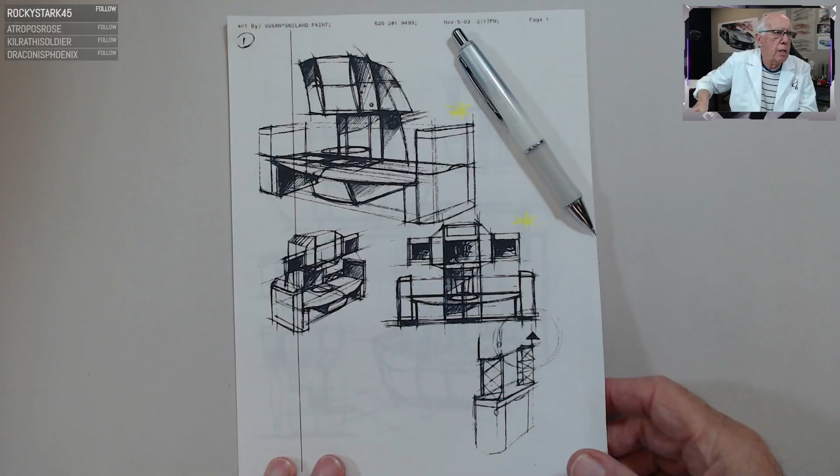This could be a very expansive program today, and I don't want to bore you to death, but this is a project that took about 2 years of product development work. It came out of California, primarily the California market, but the primary office I worked through was in Phoenix, Arizona. It was called the Microblend system.

Just a brief overview before we go into the sketch development, the history of this program: a group of entrepreneurs in California had the idea to revolutionize the paint shop industry. Instead of mixing up color with a lot of time spent getting the right mix, they came up with an overhead system to clean up all their inventory in stores and get into a more cybernetic approach to paint development, which became a module design along with storage systems to get things cleaned up in a store, much more direct and without a lot of fanfare.

One of the most important and groundbreaking features was the ability to sit in your living room and take a photograph of any place in your home—basement, upper level, bathroom, living room, Florida room—and send that photograph to a network center, then punch in what they wanted as far as color goes to mix the paint.

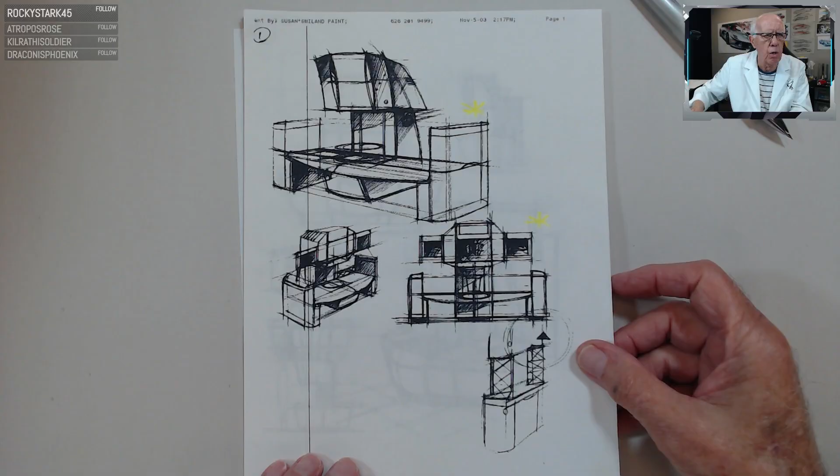I decided this would be a very unique program to be involved in because it involves so many different moving parts from start to finish, concept to completion. So let me go through the lineup, starting from the very beginning with some of the early concept sketches, and take you through the process to the final rendering piece we did within the marketing system. I think it's still alive today, though I'm not sure what the lifespan of this group, Microblend, was. But when it came on board, it was revolutionary, and a very unique system.

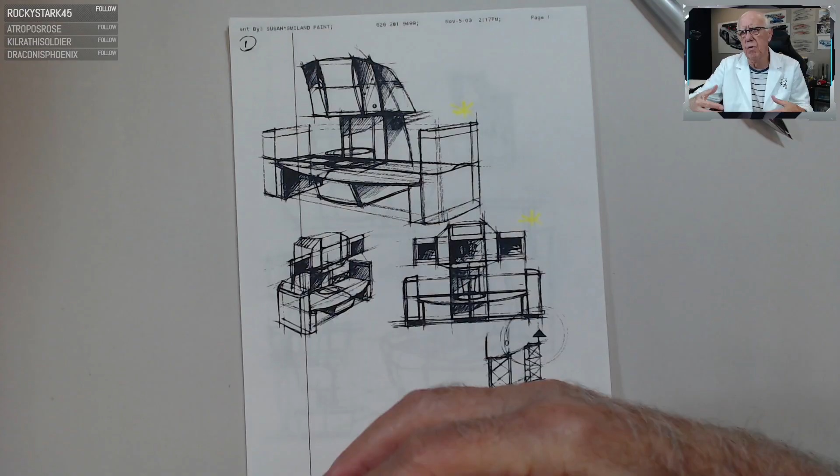From a product point of view, again, a very elaborate set of touch controls, mixing systems, television systems, containing systems, storage systems, overhead movement—an incredible plethora of things to deal with. But nonetheless, it came out to be a very good program to deal with.

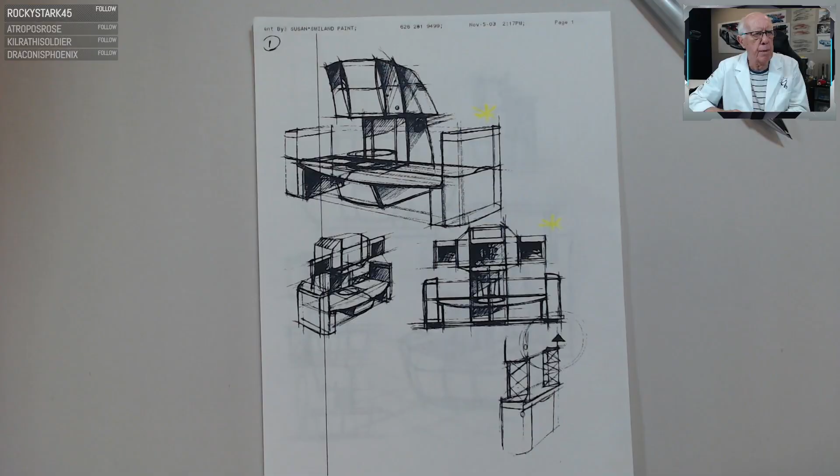So let me start here and go through a whole bunch of sketches. I'm going to spend a lot of time explaining them, but it all began here. I just brought out a Sharpie pen, a fine line pen, and started doing some thumbnail sketches based on what their conversation was. Really, the conversation from the very beginning of the program boiled down to 3 basic units.

It was almost like a kiosk module, with the actual pumping system involved in this upper housing, into a serving tray or platform you could slide back and forth. This would be adjustable, taking different bucket sizes or paint sizes. Then these 2 modules on the end were storage systems for different mixtures they needed, for example, in a pinch, to get things taken care of. The blending systems were entirely different—this didn't include some of the blending systems they were dealing with early on, which were very streamlined in pipe systems. You'll see some of those sketches later on in the process.

So let me go through these. We'll leave them over here. This is page 1. You'll notice a monitor system, very tuned-in TV screens on each side, which this design did not have—it had little plates.

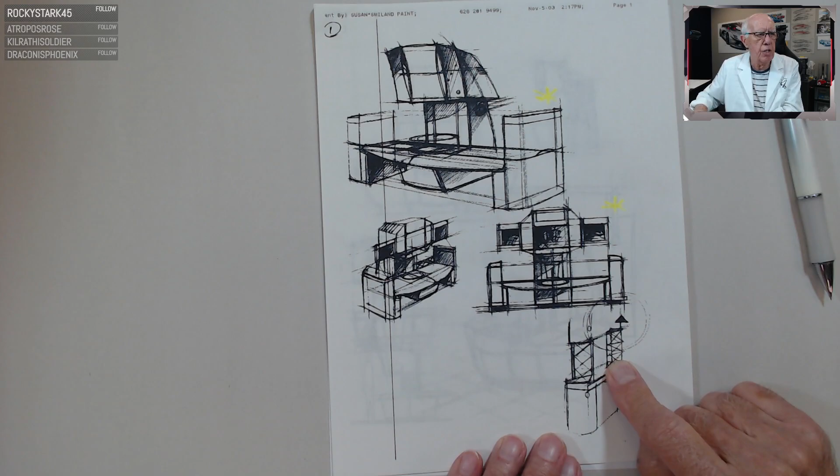Facilities for that, but it wasn't nearly as expansive as these two monitors on the right and left wing. Little thumbnail sketches along the way show another way of trussing the upper piece, which didn't work out well because it didn't support the load. So there was another page here as we go down the line. Again, simple side elevations, a little perspective, but more of a circle-in-the-round program with monitors above, and off it went from that point of view.

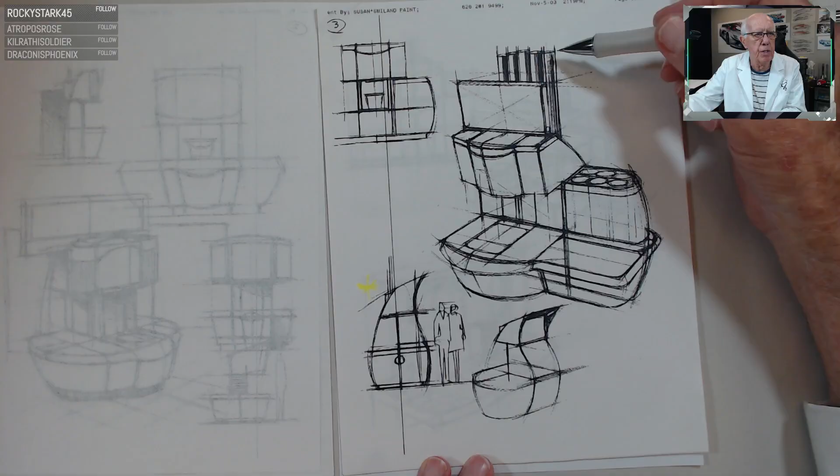So then the third series of sketches were sent. Now this is where we get into some of the mixing systems. This was directly fed to an upper overhead storage area. These piping systems would bring in some of the paint fluids that would be mixed inside this module and delivered here. Again, these are the storage containers for removal and so forth, to replace some of the pieces that were involved—brought back into the piping system to feed the kiosk that makes the paint.

A little elevation sketch here, maybe a more organic form to work with, and again a little perspective of what that would look like in gesture.

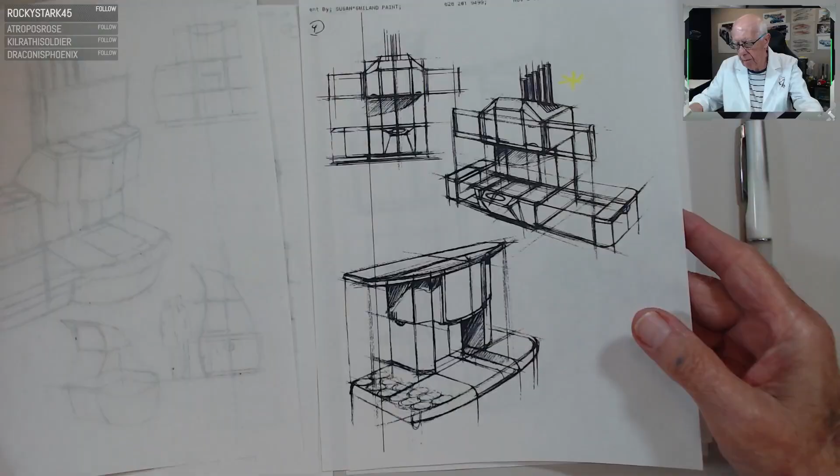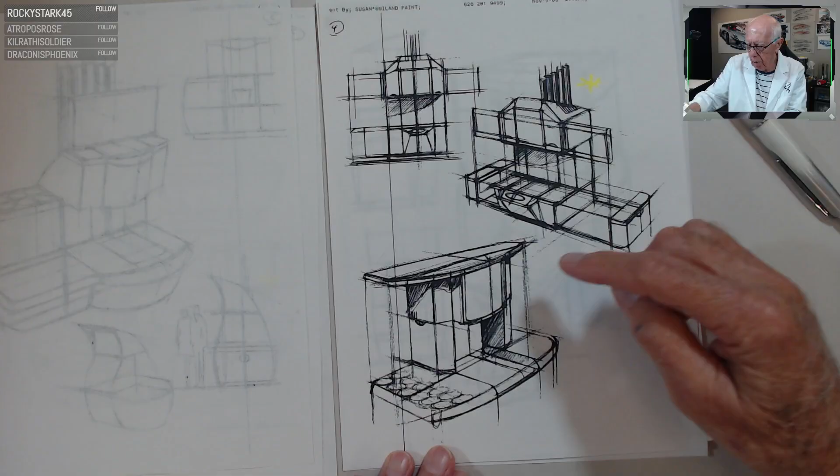Another page here, getting back to more of the straightforward TV screen system, very mechanical looking. The mixing system is in the center, with two monitors on each side. Another variation up on top where this board across the upper can be used as a shield. Notice the beginning of much more storage containers—the paint mixing platform here, then the TV monitor screen or the mixing system, piping system inside the main basic module. Again, further studies, a little more compact in this case.

I'm going to move it out of the way a bit here. This was a little more compact in terms of what the theme might look like. Again, a side elevation, and a perspective study, much more compact.

I think at some point in this process they mentioned having some limited, restricted areas that some stores were looking to get into. Eventually the plan was to go from small retail shops to a large box retailer like a Walmart, Costco, Giant Eagle, and the like. So all that was part of the plan some years ago to get that done.

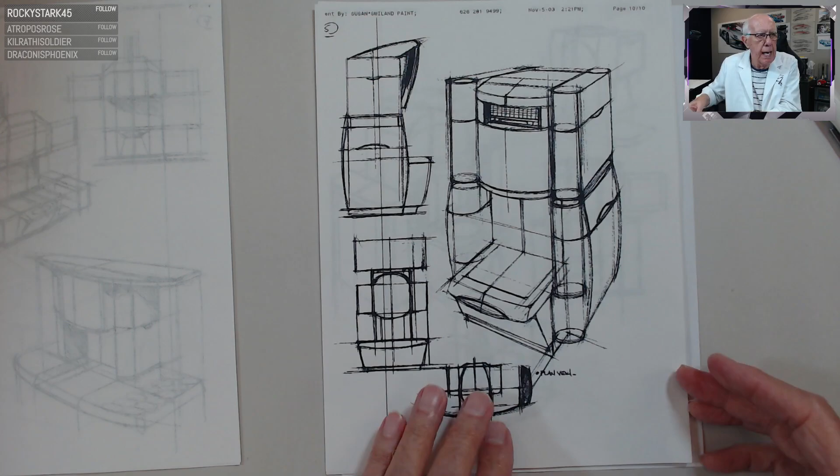Again, more compact, a little less obtrusive as a design theme. Now back to that same process where they actually had wings here—much more compact, a single wing with a monitoring system, pumping system, and a little station below. A dual system here, and maybe a fractured system, a little plan view break where you can actually view it from right and left.

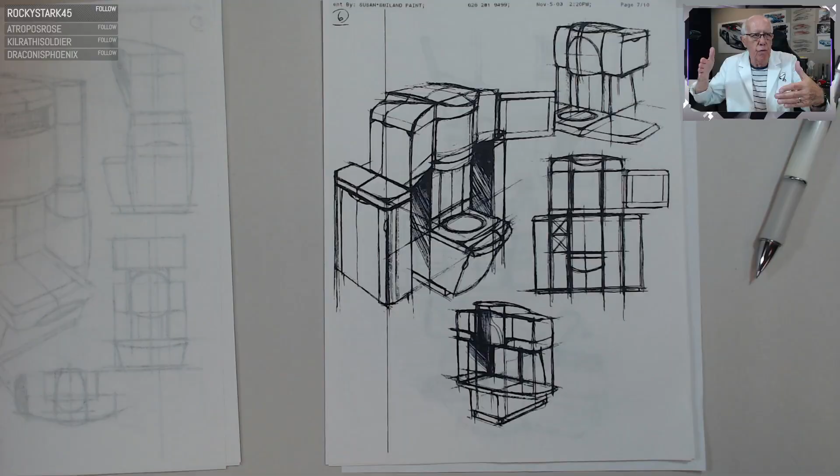You see that once, and I think in this case one of the conversations was: on one side we can show the illustration of what room has to be painted, and then this would be the mixing system process, touch screen control, where they punch in the dial numbers to get the paint system they wanted revealed. So again, additional thumbnail sketches.

By the way, just a quick interjection here—these were very elaborate meetings in terms of these sketches, done week after week after week, looking at particular things: 'Well, let's try this. Well, let's try this.' It's much more a cause-and-effect approach.

But it slowly but surely began to boil down to a simple theme, and it worked out pretty nicely in the end. You'll see as we wrap up the program today what the final product looked like—very revolutionary and very well received on the retail side of life as well.

Again, another very compact approach to it: a single monitor up on top, mixing system below, paint tray and storage on each side. Some of the systems here show how this begins to operate—this would be the lean system, this would be the table area where the bucket would mount, and storage modules on the end for some of the paint containers they needed to replenish or remove.

Back to this piping system again up on top, the feed system, the very same module series. A little bit more width involved, a little bit larger in scale, but still the same theme was all there. And by the way, throughout the conversation, all these sketches that you're seeing now were all generated as part of what-if thinking from their vision, the three business partners. Their vision was something very electronic looking, very modular, and almost kiosk-like. So that's why these sketches have a lot of similar characteristics, but a little bit of variation in theme from program to program.

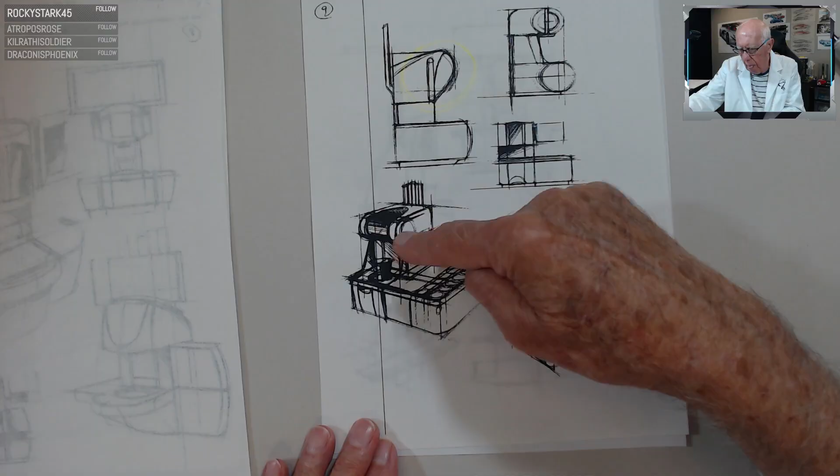A few final studies here, getting a little softer, a bit more animated look. Not really like that direction, but it was interesting to see that as one of the themes they looked at as a possibility for this headpiece, where the action mixing system or the pumping system would be.

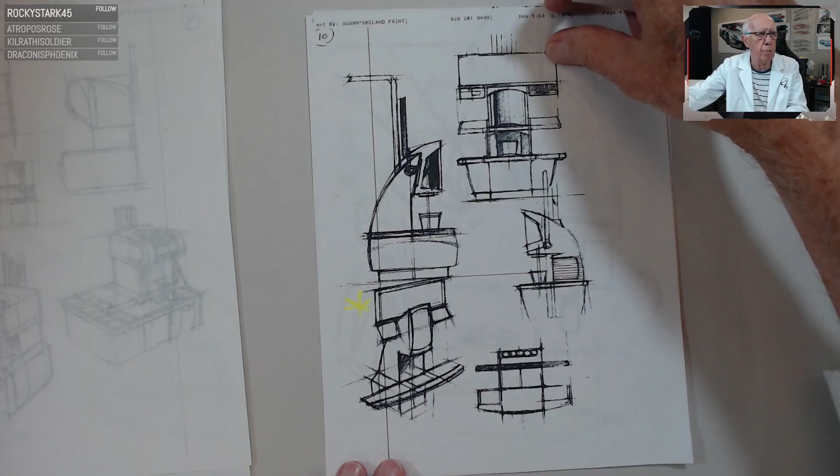Then the last series gets back into a lot more organic look. Again, there's this feed system coming into the unit itself, overhead piping, much more expansive, with one large board up on top of the system. Let me move this down just a bit. There you are. Basic elevation here, sort of the side view, with the simple monitor up on top, two touch screens on each side, a serving or delivery tray, and then the platform speaker.

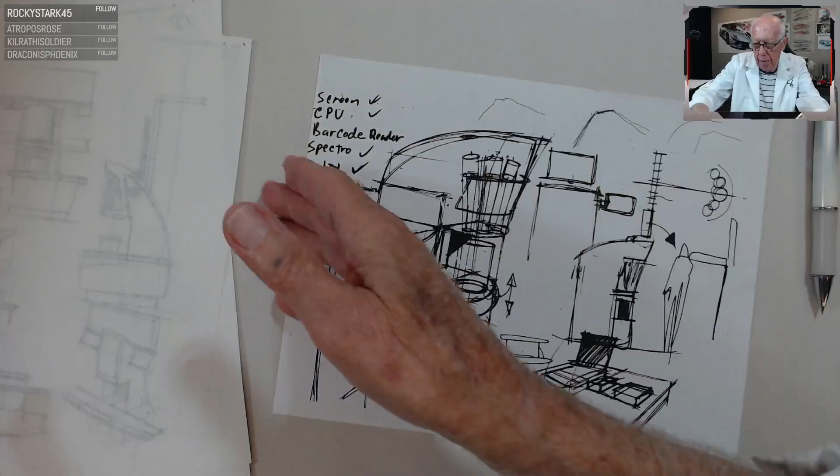But the interesting thing is the last sketch we did really broke things through. This one really kind of put it all together. Let me turn this sideways a bit and see if we can do this. Notice how this sketch began to really mirror what we were doing at the very beginning.

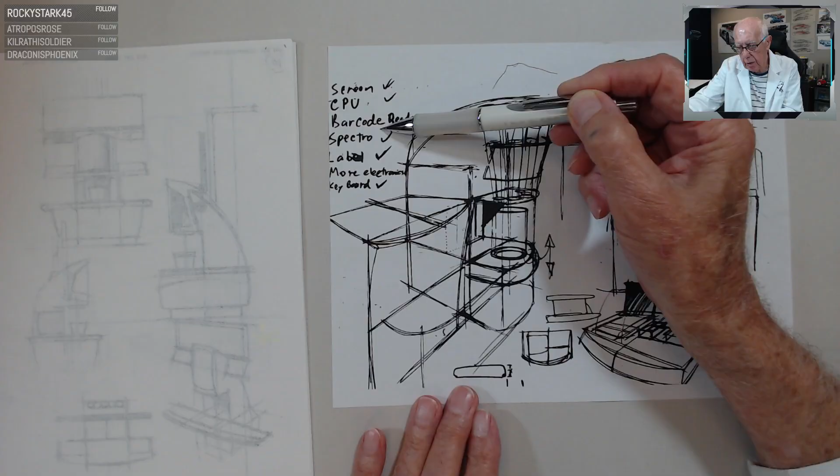Notice how all of a sudden we started getting more information about what the character might look like - the storage module, the paint tray, the mixing system up on top, the very large viewing monitor, and a little thumbnail study about what that platform might look like. Notice the things you started really focusing on: a video screen, a CPU system, a barcode reader, a spectral system, labeling, more electronics, and a keyboard - meaning much more touch control pieces along the way.

And we went to that. Now, isn't it interesting - this is where we ended up. Look at the very first sketch we looked at. This is the one I prefer as far as character goes.

Let me move this over just a little so we can see where they are. This one was the one that was picked up. It was a long series of sketches to get to this program, but the very last sketch came right back to this - our favorite, preferred one. That platform look was really helpful for them in the process of putting things together.

So let me move along here. This is the first pass of sketches. As it began to develop a little more, let me move this out of the way and get these up over here. As it moved along, these are some of the more refined sketches. I'll go through these quickly - there's a lot of history here, and I don't want to bore you to death.

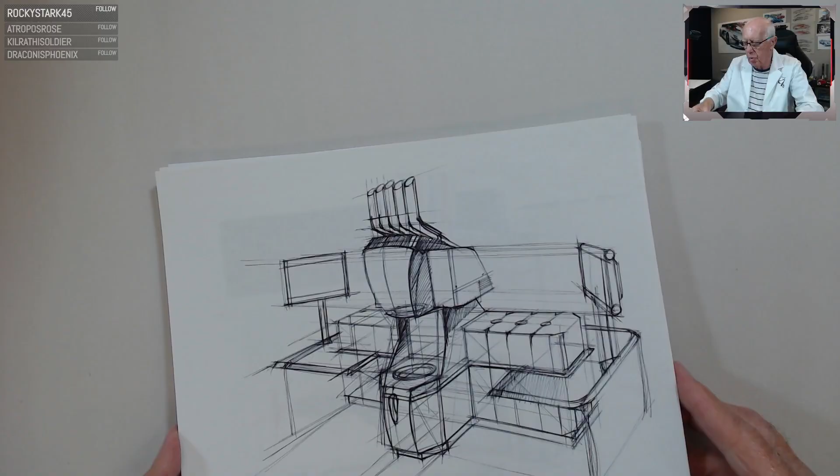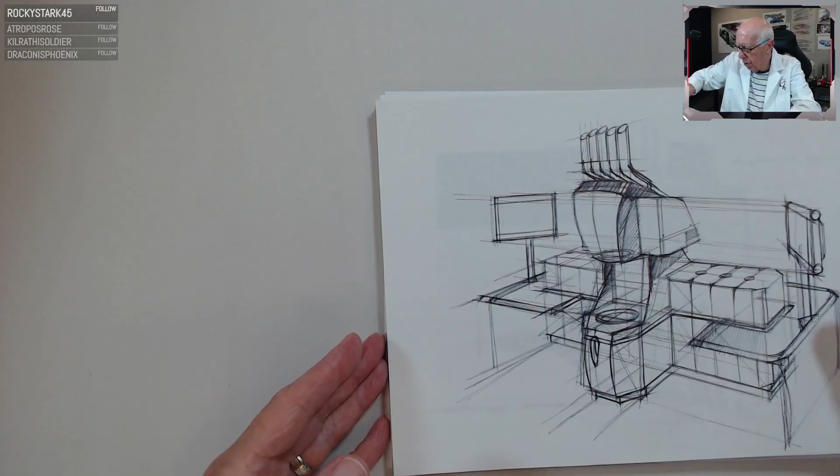But notice, once that platform was set - let me get this back in here for a moment - the relationship started to take advantage of it. Aha, that's the theme they like. What if we start addressing this thing and giving it more of a formal look, or much more of a packaging look? Let me get these out of the way again, pardon me, and we'll go through theme after theme, just focusing in and trying to find the right solution for what this system would look like.

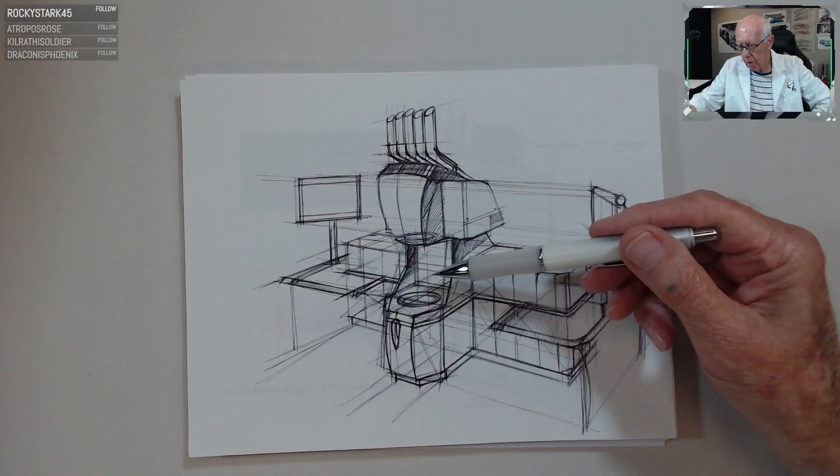Here again, this eventually was eliminated - that feeding system from an overhead storage system that I'll show you later when it got into the actual retail areas. It would feed the basic mixing module, touch screens on each side, and some of the storage modules in this table tray, or certain size gallon, 5-gallon buckets, and the like, when beginning to mix the paint. So there's one little thumbnail sketch with a bit of color added, showing primary colors feeding an overhead feed system and some of the canister modules, and how that began to look.

So we started to refine the sketch a little bit more, the scene just a little bit more. There's a little study here, same process, opened that up a little bit for an elevation. A little detail on that mixing system, the dispensing window, and how that might look in this form.

A little bit of perspective sketch, very thin and almost a wafer-like approach to the actual module that they liked. And again, twin monitors and then the mixing system coming in.

So there we go for a little further refinement sketch. All of a sudden it started to take on some of the character they liked—the mixing system, the table tray for convenience, touch control screens, the pumping system or mixing tray, and the platform for placing the buckets. This would move up and down depending on whether it was a 1-gallon or 5-gallon bucket, kind of putting it all together.

So let me move along quickly. Here's a lot of stuff to cover, and I don't want to be guilty of boring you to death, but this is a big, huge process.

About a month or two into the whole process, we started looking at what do we do with the retail space—how do we display this thing, what does it look like? This would give me some idea of what that mixing system would look like, with all these primary colors overhead and storage that you'd see, but not as obtrusive in the store itself.

And then all of a sudden, notice that all these things are going to funnel into this mixing system, into the actual module itself. The rest of this sketch was just a basic overall character.

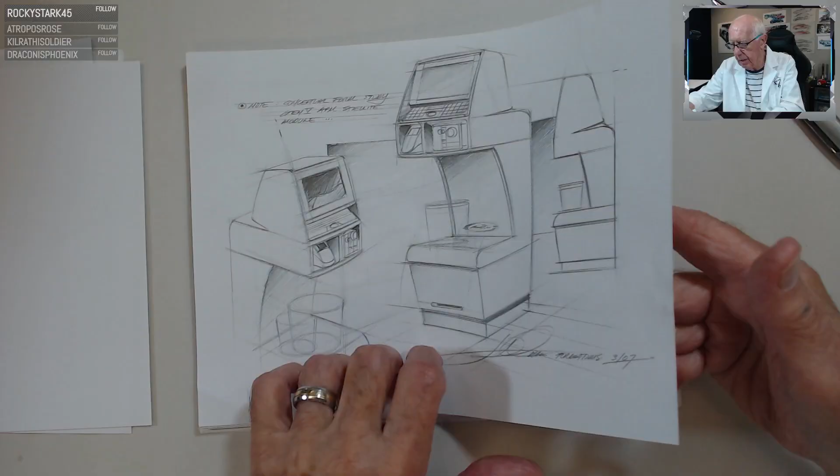But again, integrated—this is the actual unit, the satellite module in line in position with the housing, the keyboard, flat screen, and the spectral and label maker. This is all attached to this, but this piece on the right moves quite a bit—that's much more mobile. This would be the fixed system.

And then this is a color module, with a color shelf unit and storage system below. And again, same, maybe storage below, a little bit of sliding.

Notice where the bucket is in place. This thing would move up and down according to scale or size, and you get the deliverable here as it comes through the line.

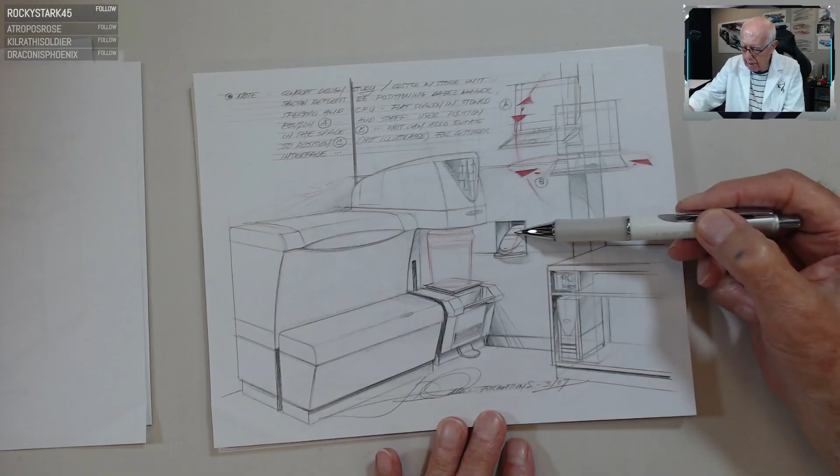The next sketch here, same process, maybe a little bit of a modem. In some cases, the stores would have maybe a separate unit here for a PC system, a dialing system, module for control, and then also a movable keyboard and TV system up on top. So this would be more of an install, like a big box system where you might not have room to put some of the elements together, so they wanted to separate that out as well. Let's move along here.

Some ballpoint pen sketches of what this module would look like. It's a satellite module, an interesting little concept that would be a part of the whole process. But again, this would move around all up through the room or with you, or certain stations within the space.

To kind of work to solve the problem that you're looking for. Paint. There's another series of little modules, Gen 5. The traveling modules here, kind of interesting little thumbnail sketches, quick ballpoint pen sketches for the actual robot itself that would move the module.

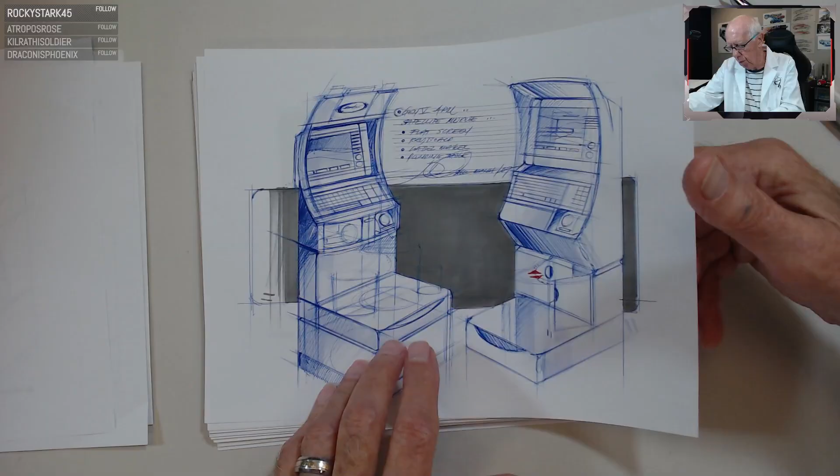And then here it is in a different position. The module side by side next to the actual mixing module. Again, that same process: storage, the touchscreen, keyboard, the label maker, and the pounding table, and then you put the lid back on it. So as you move on, once it's filled, you move it out, and you begin to pound it, put the lid back on, and secure itself.

So I think you can see thus far a lot of things are going on in terms of what this project was really all about. Again, highly revolutionary, extremely complicated in terms of little touches of idiosyncrasies that had to be addressed. How do you manage it? How do you facilitate it? What are the systems involved?

The electronics alone, the IT system was overwhelming. I'm afraid to think about how much it would cost to run this thing, as far as what their expenditures were to get this thing up and running eventually.

Again, some little studies here, and this goes back to the main overhead pod for the label maker, for example, what that might look like. Again, little thumbnail sketches that kind of isolate the piece, like the storage module that would sit next to the actual mixing module. So there's little sketches there that would kind of come together with it.

And we go back up on top here. We roll over again, still looking at maybe some very simple little form studies, stainless steel for the actual paint storage area there. Back to some cap studies for the actual mixing component in the primary module itself. Looking at different ways of treating that windows system per deliverable, and some little detailed studies here about maybe little touch controls or card systems that will be punched into that for availability in mixing systems.

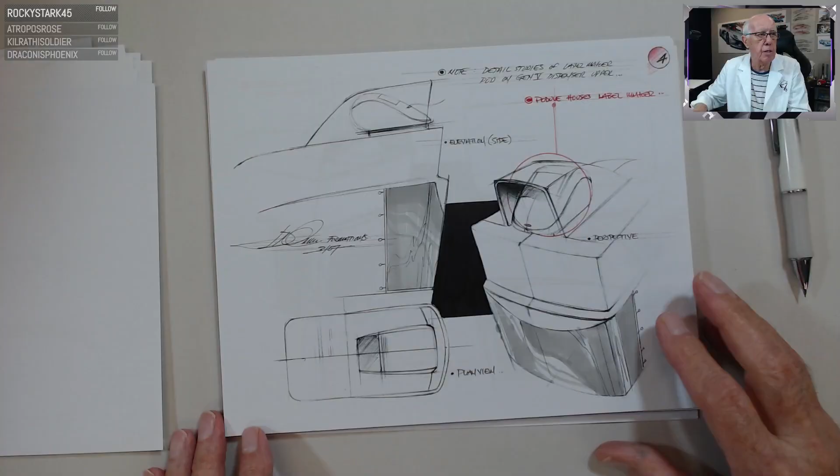Again, this is detailed studies of the label maker, maybe up on top of the unit this time. And instead of being integrated into the window, it comes in, comes down, and here's the actual mixing window here.

Elevation study shows you that, and the module houses the label maker. You punch in all that information and the label will be made, and you put that on the can as you made it for the store. Sorry for being rapid here with this thing.

There's so much involved in this, and so many sketches that were done. It was overwhelming. I just kept cranking on this thing. Great to work with, and I had no difficulty whatsoever with the actual management themselves.

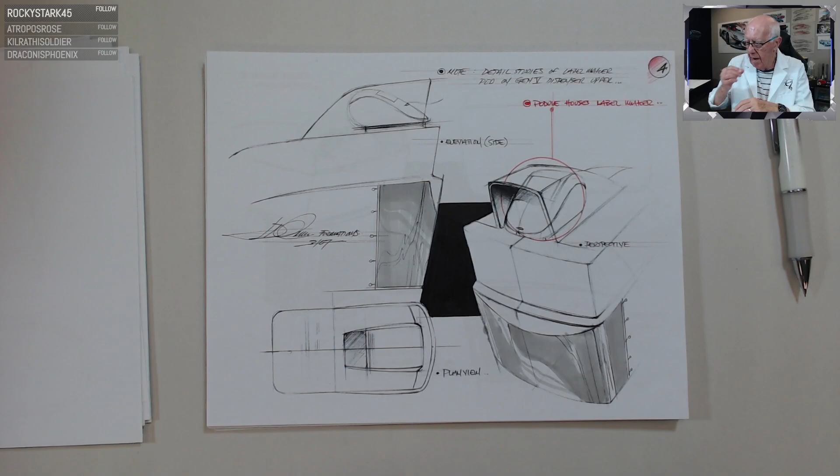They liked the process where we're following some of their input, which I think is extremely critical. You can't go out there on your own on something as massive as this. It was an all new experience for me, so I was really tuned into listening very carefully to what the issues were and what they wanted to deliver, what the character overall was. They did an excellent job guiding me through the process.

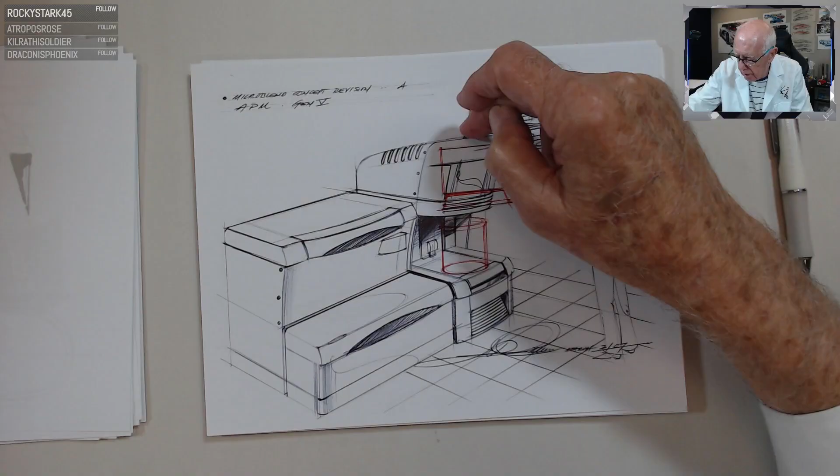Little thumbnail sketches, really rapid little pieces. These are all part of the history of this thing now. Back to some studies with a label maker inside the actual microscope module. Really quick studies here, and this is a compatibility piece where you've got the actual monitor attached to the side of the piece itself, which would pivot and move up and down.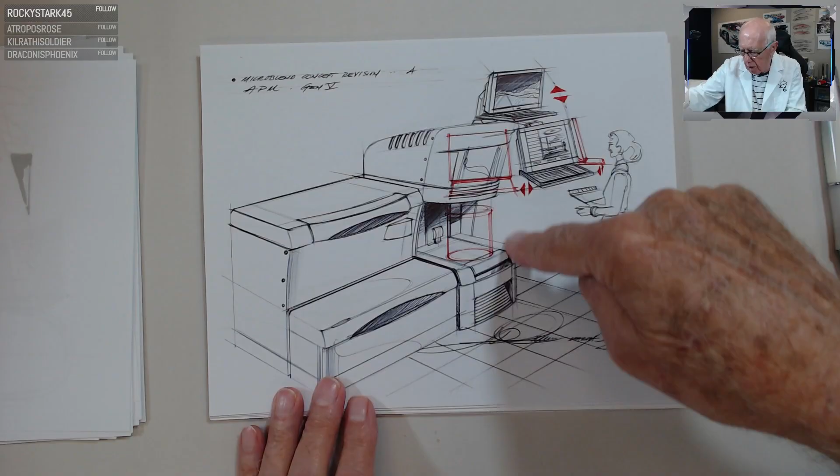You'll see that as we go down the line in the actual solving of the problem. Another little family of forms here, the robot and the actual module itself gives you some idea of the scale of this thing as we begin to move through it and put the pieces together. Nothing changed much. We kept that same overall hood, much deeper now because of the mass of what had to take place behind this thing to make it function.

Again, the labeling system in a weigh station here. This is a little module, a little robotic module that will move around with you as you go through the process. Let's see if that's one. There we are. Here's a little color study that was done for it.

Just a real brief little color study, which is a compatibility piece. There's a little module next to it, so that goes there. Just a line study here to kind of put the pieces together. Handle system that would move up and down or be removed, so it can be removable.

Little black and white concept sketch. The lid opens up, storage inside that. Again, the satellite module itself on the other side. And again, the main mixing module, right in center.

Here's another one, color study. This would be more of a retail space, like a large box system here, where you can move this over just a bit. You'd have a traveling little laptop that would fold and be concealed, and then a power system underneath. The label maker here, and again the mixing system and the basic module.

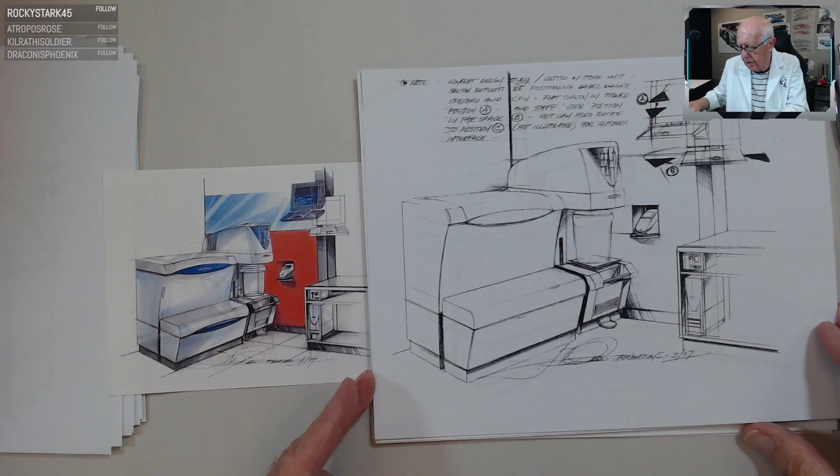This again was a restrictive area that we were working at. If you've got a very small space, like an 8x8 square in a retail space, or a large big box area, this would help facilitate that look.

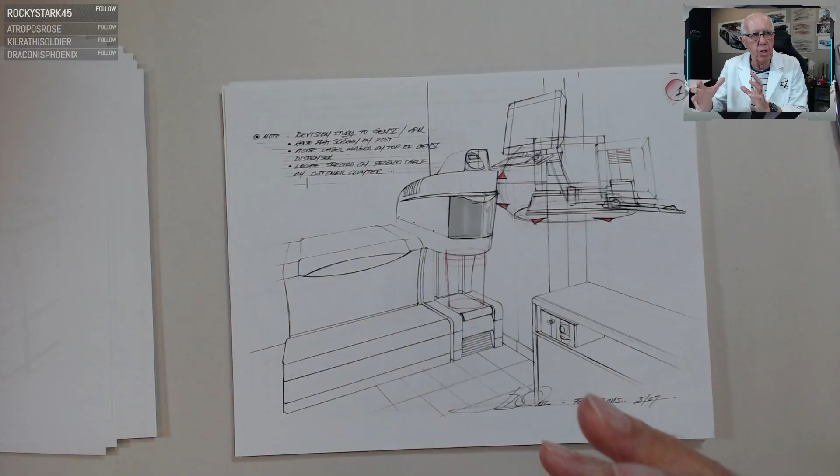Let me put that in place here and we'll move along, get this back in the center. There we are. Again, same little line study here based on it, a bit more of an elaboration of how this thing might pivot and move around this laptop system, with the same refined space concept here. Let me move this again just a moment. Let's get these up and running out of the way. There we are. No more space to work with.

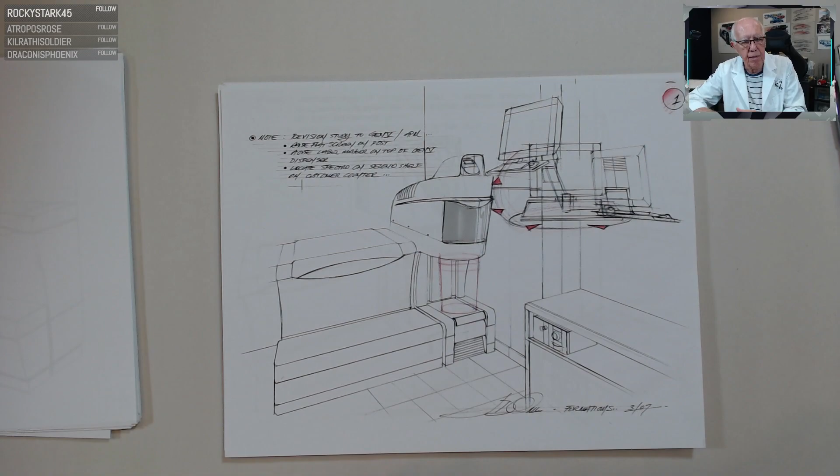As you can see, there were so many things going back and forth in terms of conversation with management - let's try this, let's try that. So every sketch had a function behind it. Nothing here was wasted as far as I'm concerned. It took this much time and effort to really tune in and focus on what the actual concept was and how they wanted to deliver the whole goods.

So here we are, I'll move along quickly. Another little detail of that same system. Gen 5, revised direction to cleanly integrate the label maker into the upper.

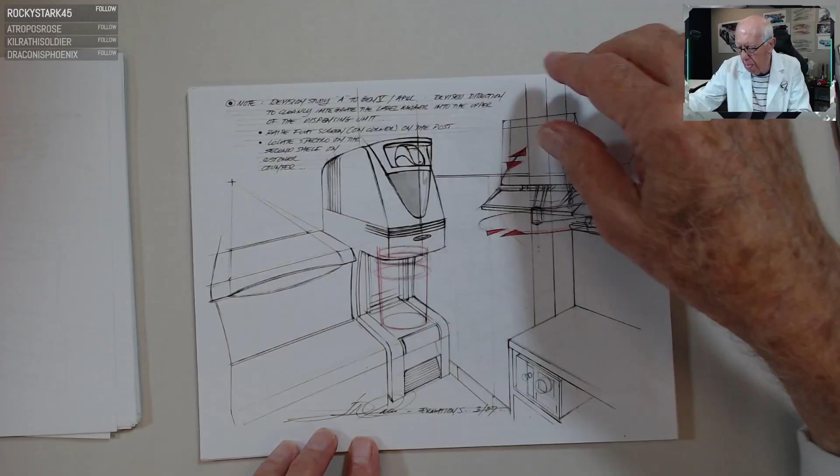Again, the same mobile system here. Second shelf on a customer counter, sit here and over here. You could put information on that counter shelf in that restricted space to work with. A little module again, with the satellite off to one side and the actual bucket system.

A little detail here, much more the same thing. We've got a couple of little color studies here. Here we are again, that restricted area. Notice the in-store layout, for example, keyboard, spectro, label makers, all these things.

Now we move a certain thing from underneath up on top of the same mounting post to keep things integrated and all together. Notice a bit of a change in the character of the actual pumping stations, the modules that would inject the paint into the actual bucket.

We go down to another little color study, same process, restricted area. Back to line drawing again. Some of these are probably redundant.

Pardon me here, elevation study real quickly. Again, this mechanical elevation of that little module area here. This would be a detail of what that pulsing system would look like with that arm on it, you can kind of pull it out. And a very flexible side elevation of the pivot arm for a user position.

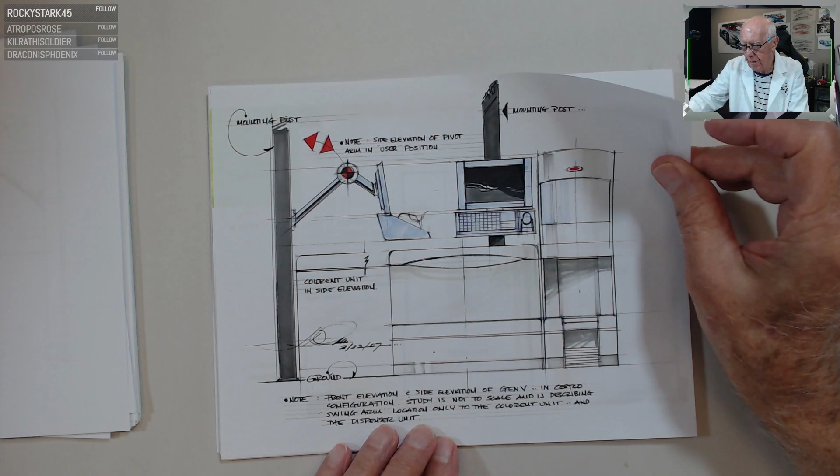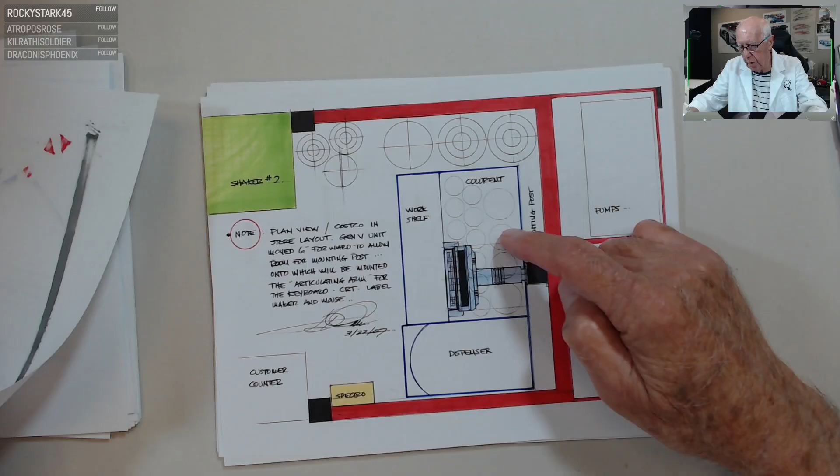So overall plan view, for example, if it went into a tightened area, very simple area. The shaker would be over here, the actual colorant would be here, there's the actual mixing module, there's the post we referred to earlier. That was over in this sketch here. This is a plan view look at what this might look like in store. So that's part of that process.

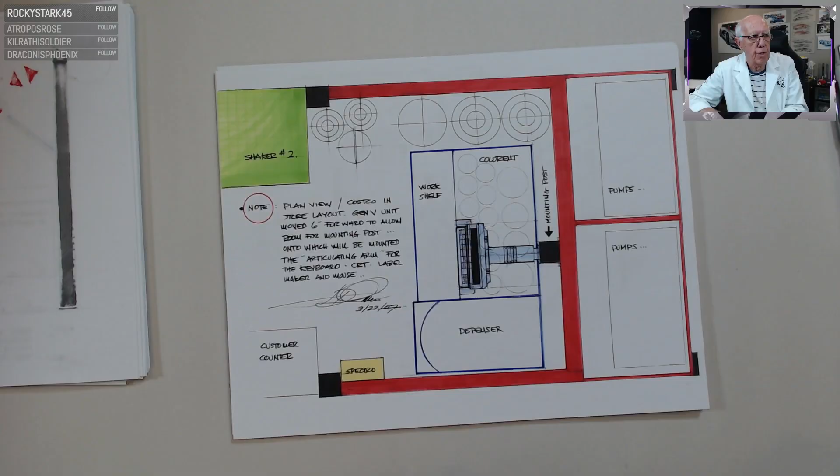So move along here, now this is interesting. Now we go from this generation, opened up the door. After all is said and done, this sketch was finally part of the process as we're going through this from day to day and month to month. The individuals in the marketing team in this group were going out there trying to sell it to the big box operators like Costco, Whole Foods, etc. Costco, I think Walmart, that box size. So this became a breakthrough to get things moving.

And then once we got this, when they saw this, this is an interesting concept for paint use. We can save a lot of space in inventory. It's all condensed, very focused, a very contemporary looking piece of hardware. Let's take a look at this thing. So from this sketch, all of a sudden, Costco became the first primary manufacturer or big box to look at this thing.

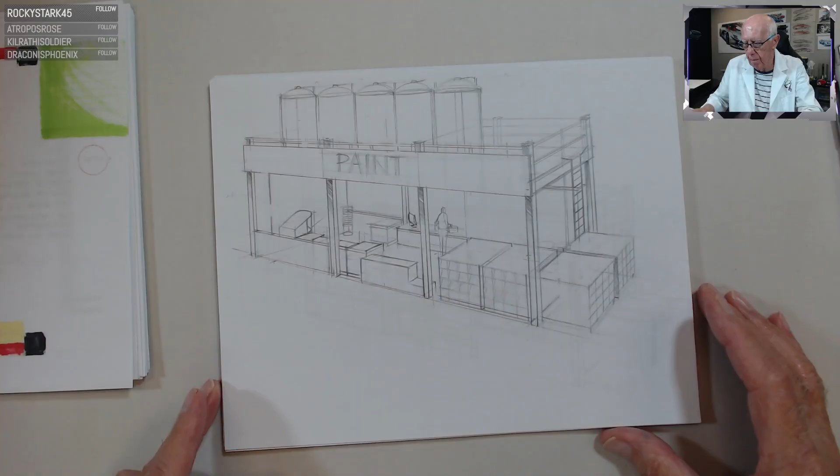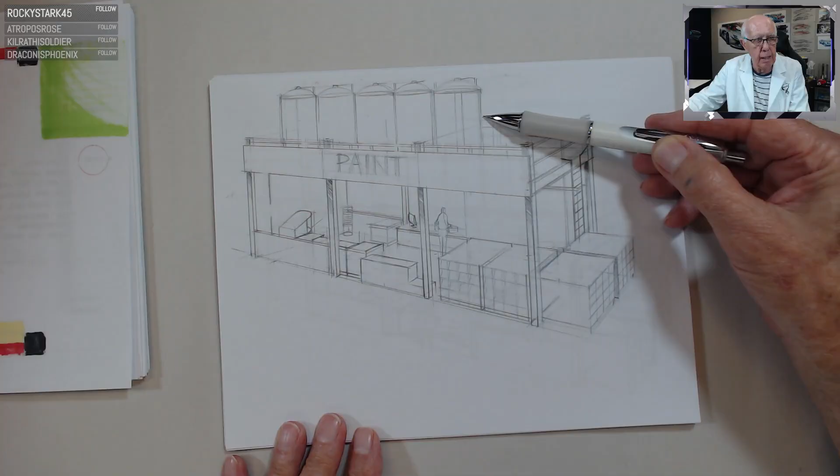Again, down below, here are some of the pallets, for example. There's the actual module back in through here. Actual paint storage up on another shelf. This is actually a graphic across Costco's header to tell you where you were. So this series of sketches now moves from the actual module itself into the big box retailing system, how they wanted to treat this thing.

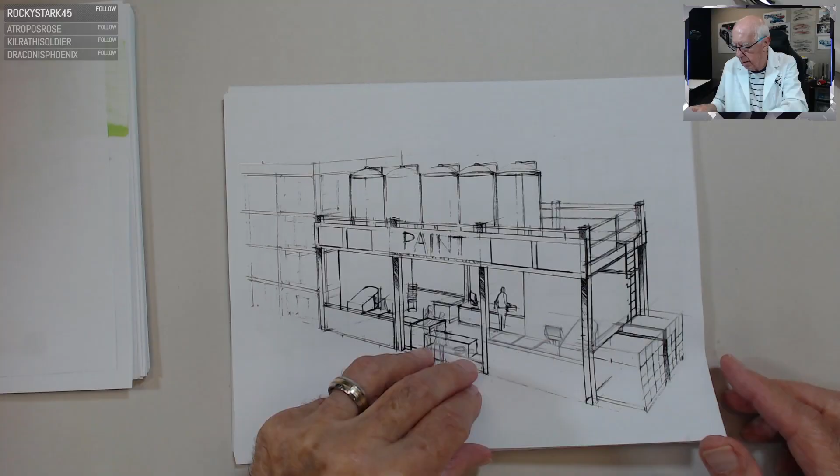So I'm going to go very quickly here, we're going to go through this thing. So here we are, here's one. There's a line study, a little black and white study of what that might look like. Here's another variation of that, again the mixing system up on top, the actual module down below, some of the paint chip colors I could work with, and some of the visual things we could deal with. In-store presentation for Costco, black and white study there.

Pencil sketch. Again, there's another variation where we've got an actual paint system here. This is one of those restricted areas we were talking about where the actual paint module was in place. Again, for Costco. These are very quick sketches, so I'm going to move along rapidly.

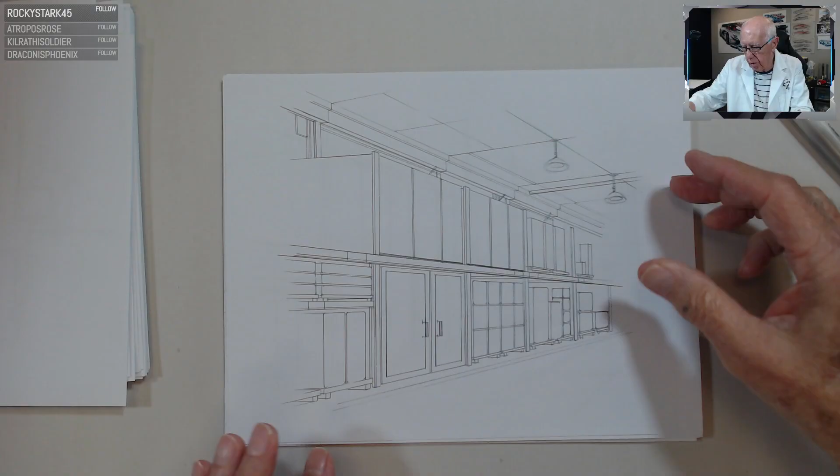Not quite the same design, we just want to restrict and get an idea of what this might look like, a little corner module in Costco. Another approach, this is more of the situation where the storage modules for the paint would be up on top, and all this would be storage underneath here. So again, a line drawing. Let me get this out of the way here, guys.

A little pencil detail sketch of what that might look like. Moving quickly here so I don't bore you - another small variation on theme. This is more like a holding station or benchmark station where you come in and put all the decisions together, and then that information is sent to the actual module in the store, which begins to mix the paint.

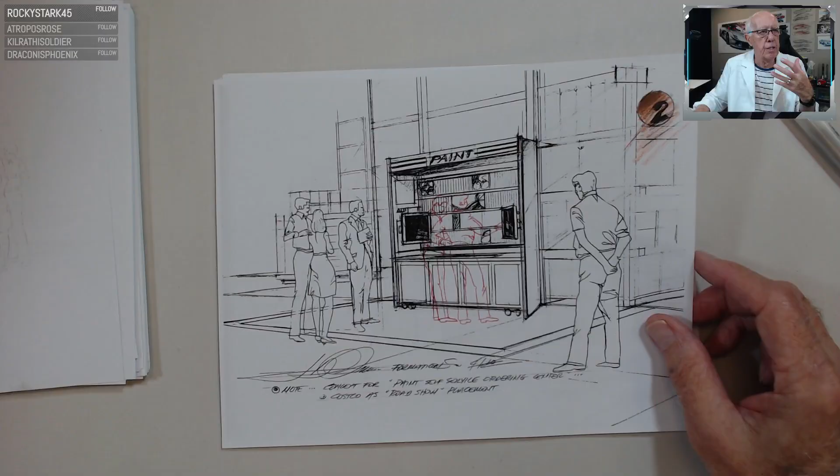Another series of storage systems, how it's all put together - paint below that location, a little detail sketch here, another detail sketch. There's so much work being done at Costco, they're looking at this. We had to work within restrictions with the storage towers where they've got these blocked areas, only so much space to work with.

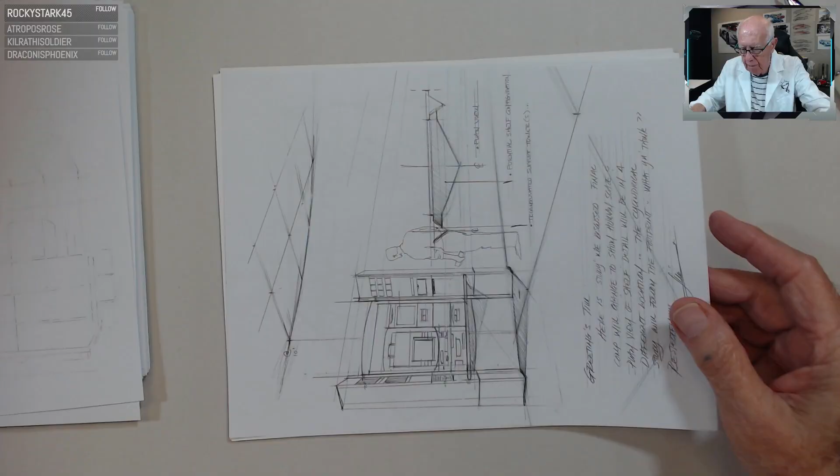We didn't have a lot of freestanding area here - it was all closed inside this actual form itself in the store. A little detail sketch here, another variation on approach to this mixing station.

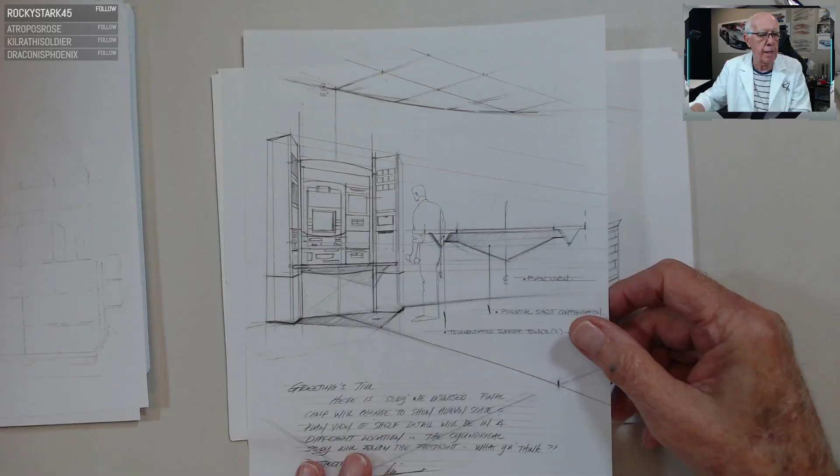The final composition will change to show human scale. Plan view detail at a different location, so it will follow. Again, a little bit different information kiosk here with all the materials for Costco and Microblend worked into the system. Another overhead shot of a bigger area, for example.

Paint storage up above, retail down below, the mixing systems - two of them here - and then the front counter would be like a mixing area with paint selections and supplies. So there's a bit more of an expansive look at how this might work in a larger space within Costco's system.

And we come down the line here once again - here's the actual line drawing itself, and there's the actual color study as it came together, based on the pencil sketch, showing what that might look like. So again, all the modules underneath, a lot of retail up front.

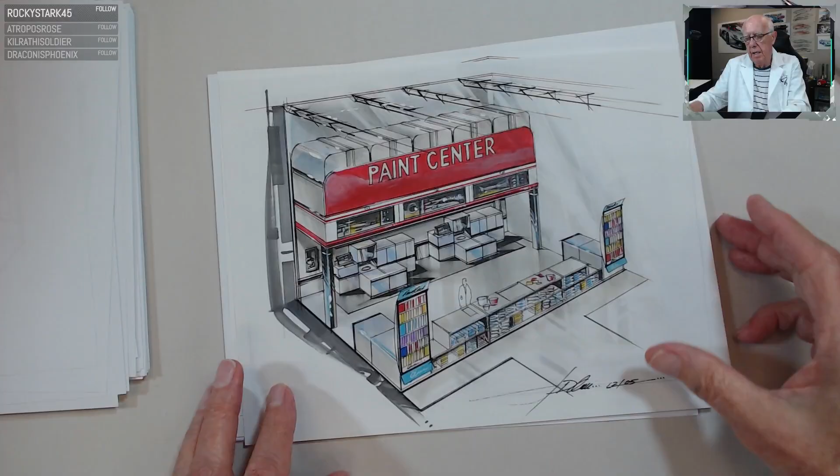While I'm at it, this is interesting too - I think it's worthwhile to say that this became not only a product design piece, but it moved into an architectural interior space study and also an architectural exterior space study. If we have time, I'll show you how it all ended up, both indoors and outdoors. It was a really expansive program.

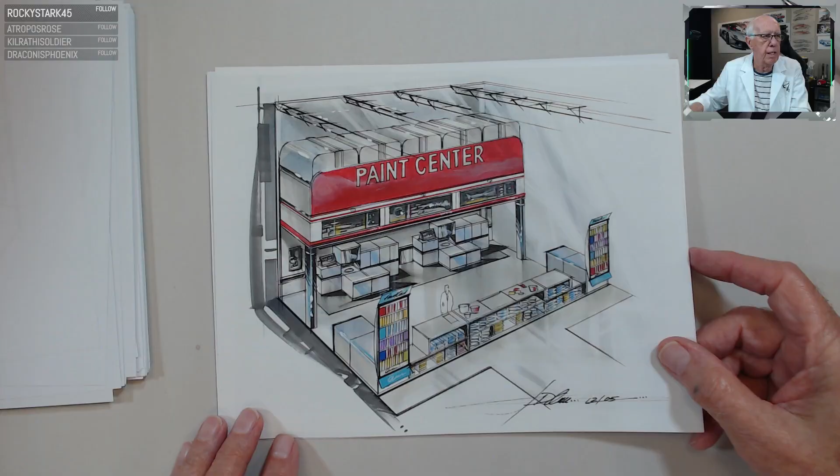An incredible amount of things learned, great stuff to work with - I really enjoyed it, tremendous program. So again, product into interior space, and then into exterior space and architecture.

So let's move along here - another little study, carbon copy of that one. There are some digital pieces where we actually put together the actual display area in the actual store, showing one area that might look like within Costco.

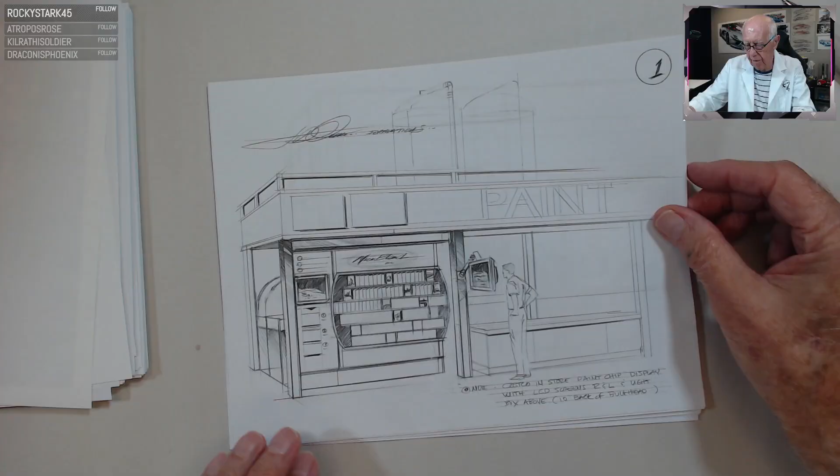Now again, back to some little pencil sketches on 'flavor of the day,' for example - an information board for color systems, touchscreens, information from residential, and a touchscreen up front here for the paint chip display, and how that will all work. Paint chip display, line drawing.

Again, retail space and interior sketch here - this is a series of line drawings that started with this interior sketch to lay down what it might look like if you went to a larger store format other than Costco. Let's say you had a freestanding or in-a-mall paint shop with this Microblend system placed in it - what would you then do with it?

So there's a little pencil sketch - again, the paint chip display area, some of the modules here for looking at the paint system itself. This would be a little delivery piece; there'd be two or three of these pieces along the way that can get it all put together for you. So there's a little line study.

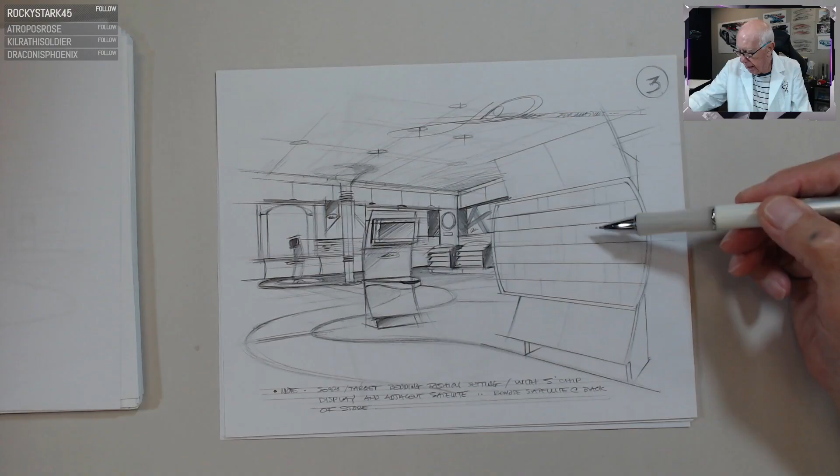There's another variation on that same process, like a retail space, a freestanding kiosk, the actual paint chip display area. Again, looking at the retail, how to present this thing not so much in a big box area, but in a small retail space.

There's another little variation and sketch of the board itself, with some idea of the paint to use, and a texture panel behind it. This could possibly work for a Sears process, or maybe something in a Sears or a large department store, Macy's, etc. That can all fit as well.

Now we move into some things they were looking at as far as headers for the actual store at Costco, back to that large space. They wanted something like a header piece that would display the pumping system and how that would magically display some of the paints. So the magic of Microblend - we put together a series of concept sketches of what that might look like.

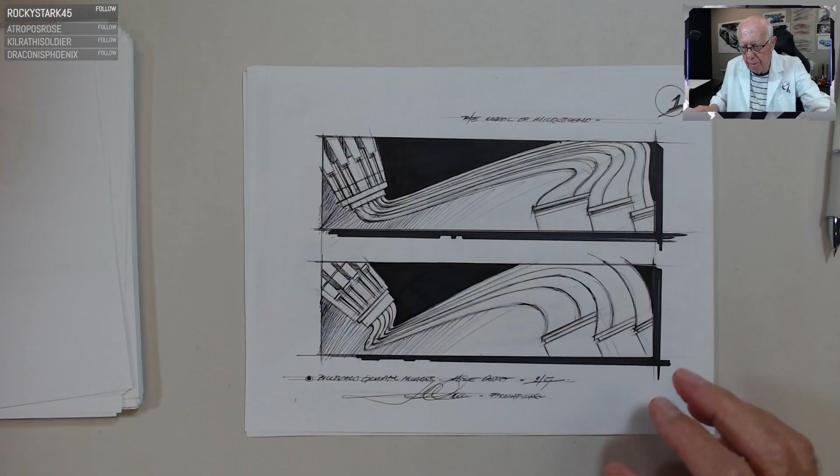As a header above in the Costco, for example, across the top of the store area here. Variation of the same theme. Actually, these would all be different colors, kind of forming a rainbow across the top of that header in the store itself. And again, some black and white studies here, just laying down shapes and forms.

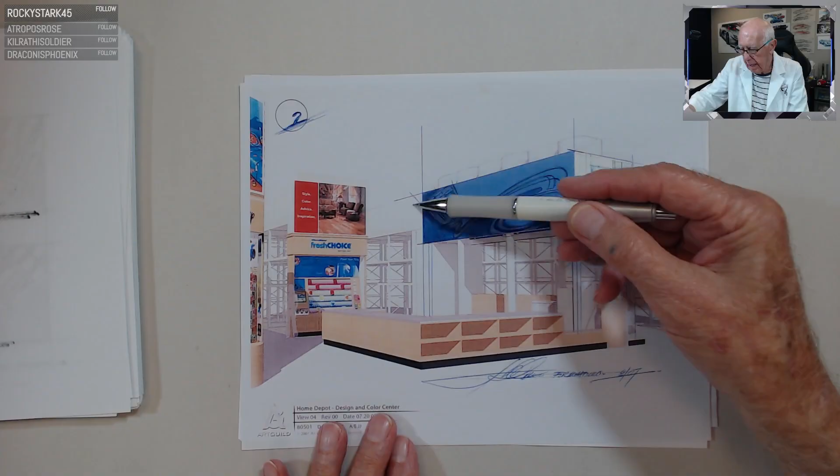Over here, variation 2, same basic theme, the magic of Microblend, with a different little image behind here. The actual store below is the fresh choice painting process, and the actual module will be located underneath this very nice, simple storage area down below.

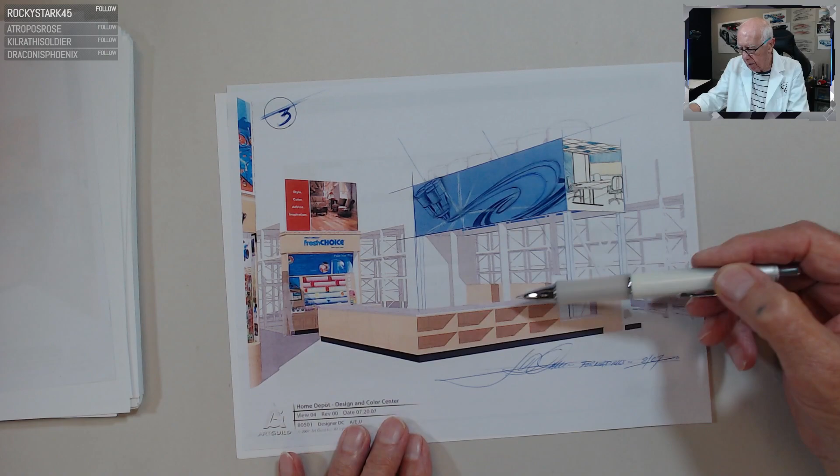This would be a Home Depot piece, for example. It could be interesting, in addition to Costco - Costco, Home Depot, any large manufacturer like that, interesting. Lowe's, all these companies are really interested in getting this piece put together for a little elevation study and plan view study of what that might look like.

Again, Microblend, Costco plan, back to Costco. Again, this one - same Costco, different little paint booth display. This would be the actual module area here and all the elements around it. Notice again, up on top, this would be the actual storage modules where all the paint would be held and then delivered back down into the actual paint process itself.

Paint your way, a very interesting theme. Again, it's all predicated on getting away from going into a store, looking at chips, and then having to wait for it to be mixed. It was all done digitally ahead of time, a very revolutionary approach to solving this problem of getting into these spaces that were so unique.

In terms of simplifying the actual painting process and getting rid of a massive amount of inventory - for example, in a paint store you've got all these elements coming bucket after bucket after bucket. This would be a very simplified approach to getting that piece put together for that purpose. Very interesting. So that kind of takes care of that family of forms.

So let me kind of move these out of the way a little bit, put these back in order, and we'll move into the next phase here. I think I've got some additional pieces here - move that out of the way.

Here's another stack here, some additional line drawing studies that you've seen earlier, some of the actual display areas and the big box areas here. So I'll kind of move through these very quickly. There's one - another little line drawing about what that paint system might look like as far as retail space is concerned.

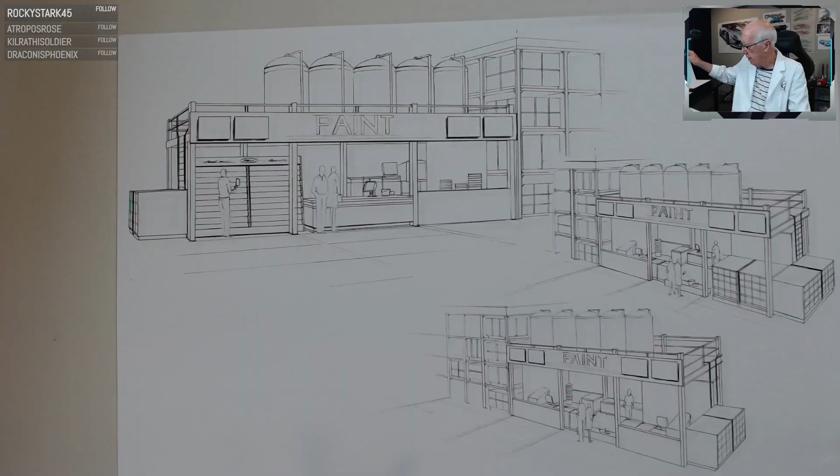Again, some of the actual module areas here - for example, this would be a Costco setup where you have the actual modules up on top. Let me get that thing set up there just a bit. There we go - variation on theme, for example, 1, 2, and 3 different views.

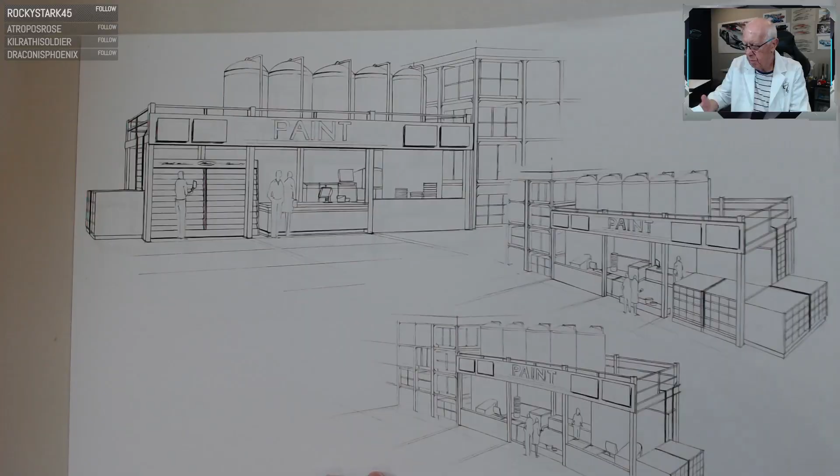Again, notice where the storage would be, the actual module system inside the area. This would be the retail counter space here to work with. Again, it's a little black and white here, very strong study. That looks like there's another variation on theme here.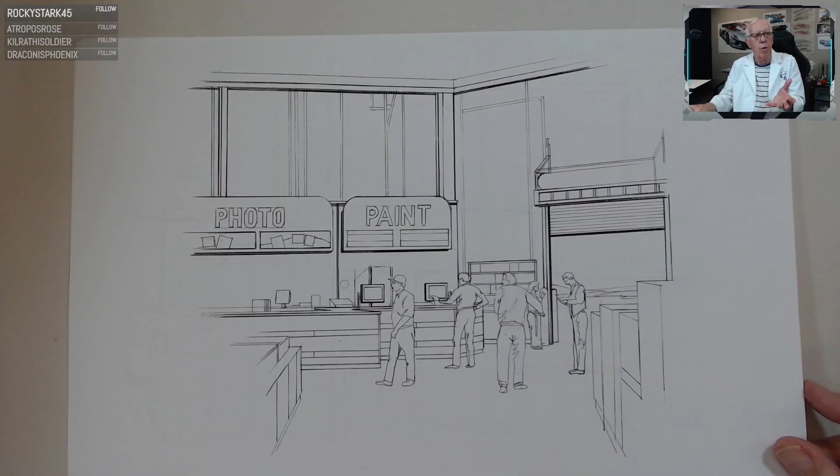So much work to be done - as I said earlier, this wasn't just a product design form, it was also an interior space study and also an exterior space, which I'll show you here as we wrap it up at the close of the day.

And that, another module series - it's a color system down below before you got to the actual paint station in Costco. These are the actual structural beams that was all put together here. Another little variation on theme.

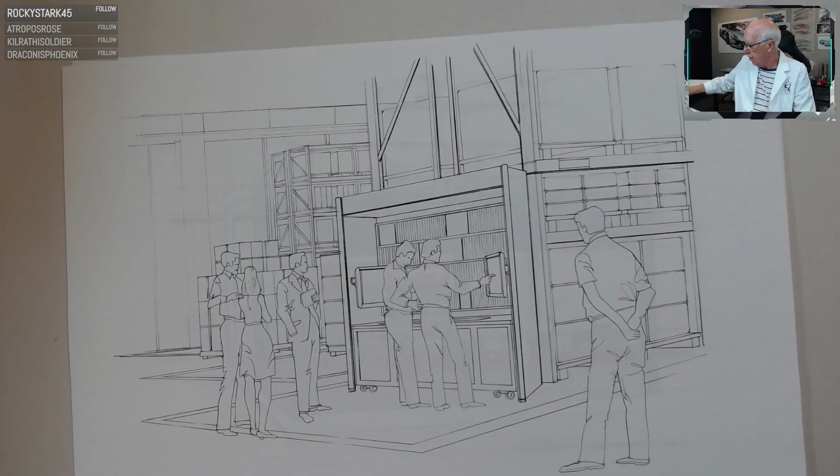Mixing system. A little color study based on what that might be, a very simplified approach with the actual mixing pieces up on top, color design center, and the actual module system inside the store itself with some engine turning plating inside either a Costco or some sort of a Home Depot area, or Lowe's, actual paint system, and again, to put it all pieced together.

Now notice again, I would consider this an interior design study because now you're no longer talking about the actual module that mixes the paint, but you're now dealing with an actual interior study at a large retailer to kind of get the thing done.

Here's another variation of a little color sketch on what that might look like. The actual paint system itself, some of the actual pieces in the inventory above here, some of the storage systems for Costco. You would use this system here to pick out the colors and then move back into another retail spot, maybe around the corner or somewhere down the line to pick up your actual paint itself.

You can actually program all this ahead of time, have the machine take care of it, and then pick it up as you begin to depart the store.

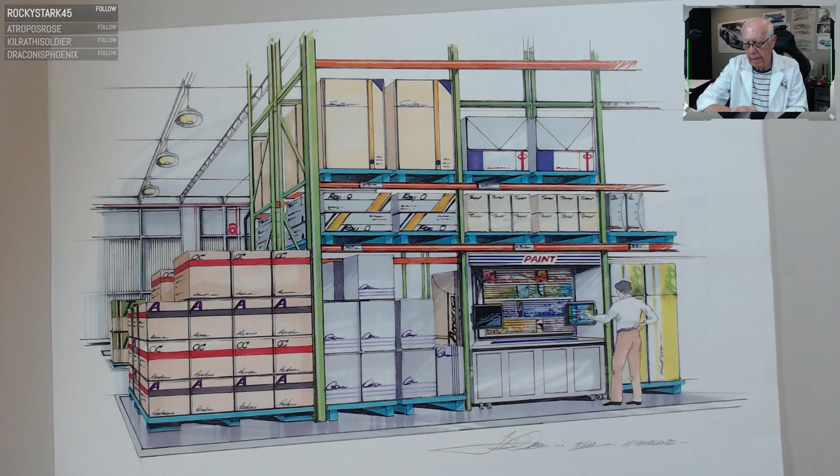Another variation, color here, a little paint display system. This is all in excess of what might be available in the Costco. This has nothing to do with the actual Costco or Microblend system. This space was given to us as an area to explore and put together graphics for within the actual store itself. So there we are.

Now let's go back. This is not interesting. Now we go back to the product itself.

This is now a series of sketches that we're slowly but surely closing in on the actual concept itself. Notice again, same basic module, same feeding system, the dual systems up on top, the displays, the actual pounding table, and then the storage modules for paint systems on the wings, right and left. Again, an indication of what that might look like in human scale.

So here we are, back to square one again after all that investigation of concept sketches into the big box areas, some interior studies of what that might look like at Costco or some of the big box areas that we're looking at installing this material or this piece of hardware into.

Then right back to the design refinement. I'm going to try and wrap it up here as best I can with some of the final design sketches that we're looking at for the actual finished module itself.

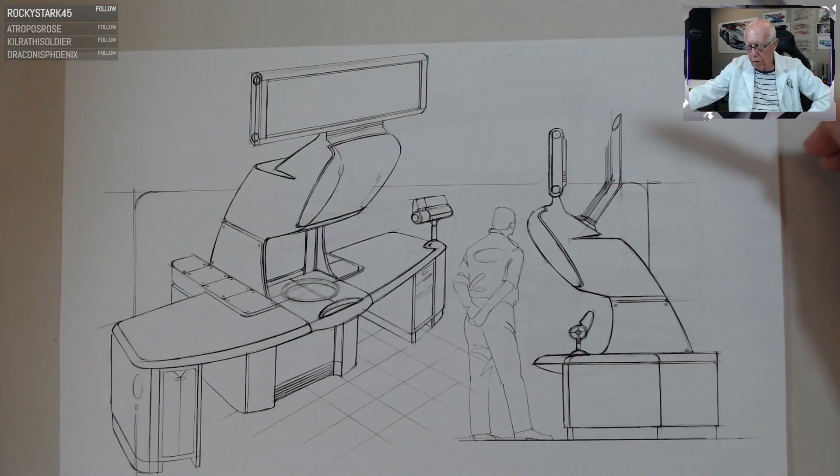So there's a line study, number one, of it. And there's another line study looking at it with an overhead piece, the actual module behind that hidden, and the actual lean of that mixing module.

And again, a little touch control piece on the end, very simple, and then some storage modules right and left of that pounding table, and some storage underneath there with power units underneath. Another variation of the same thing, just very simple line drawing studies here.

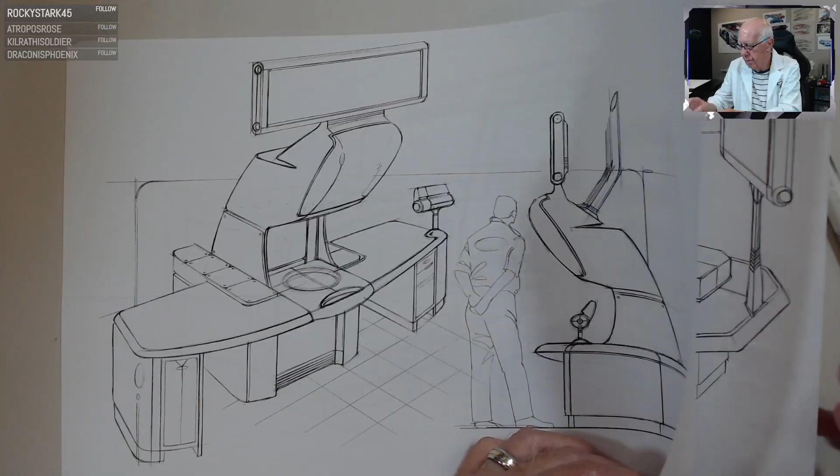Now let's get back to this. And then again, phase two. Another variation in theme is to go back to some of the earlier sketches we did. They kind of liked this approach too, with this very large storage system, the actual mixing module, and this little robotic piece that went with it.

I'm not sure if they actually ended up with that robotic piece as part of the final piece, but little by little we started to slowly move it. This was one of the things being looked at, but I don't think it really hit the same target as this piece here did, for example, with the dual modules on it.

Or, again, this large table with modules on each side as opposed to an overhead mirror piece. It's kind of complicated. Let's go back on, and that was it. Now, I think the next one is the one that kind of hit all the bells and whistles. This is where it all started to turn into the actual final piece.

Again, I'm going to move this out of the way here just a little bit. There we go, right there.

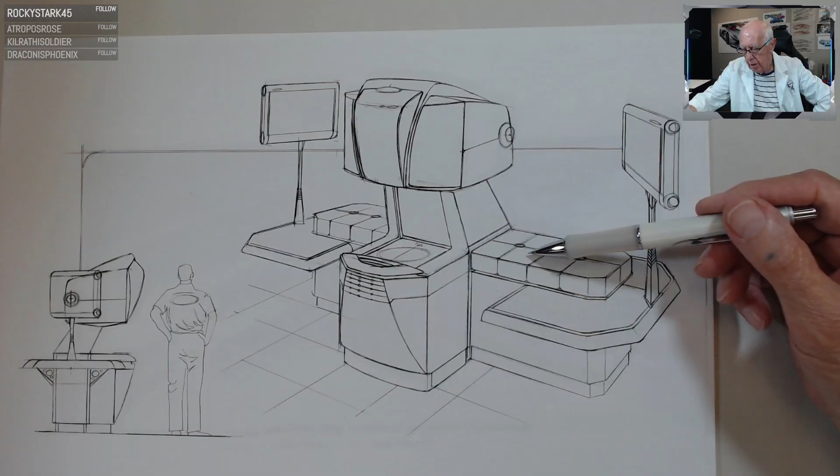So what we ended up with, for example, was this, where you had monitor to monitor, mixing system, storage containers, and a table here that can actually move up and down. An actual gallon or 5-gallon bucket here, storage modules above and below. Again, very interesting approach. This is all solid. We have a service table here, a little service table here. What it might look like in elevation and given human scale. That's what that might look like.

Now, from that sketch, I think we move into, now you ready? Here's the final study. All the elements and all the discovery put together. This is the one that finally hit all the bells and whistles. This is where we came together.

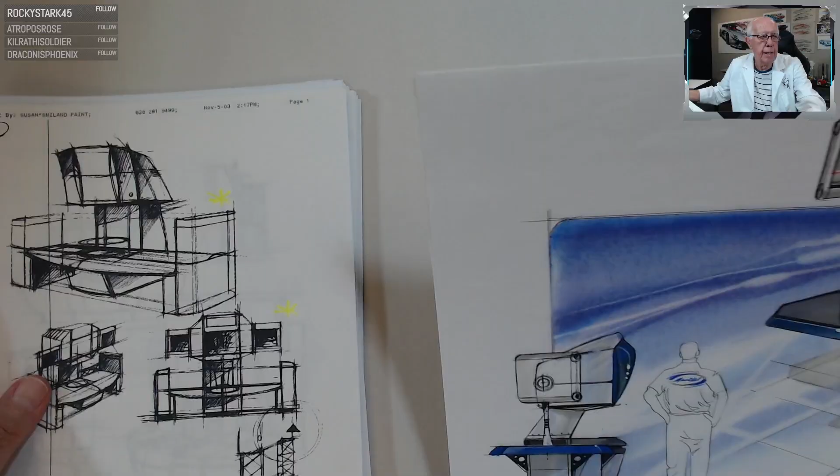There it is. So that theme, for example, this theme in line was really interesting. As far as we're concerned, the management loved that approach. We went to this, and just for comparison here, look at this. How really similar this is, right back to some of the earlier sketches we did. For example, look at that guy, black and white study, way back, the very beginning, almost the first week of concept sketches, into where we ended up after months of almost a 2-year plan of putting this thing together. Very ironically how it all came back to a very simple approach.

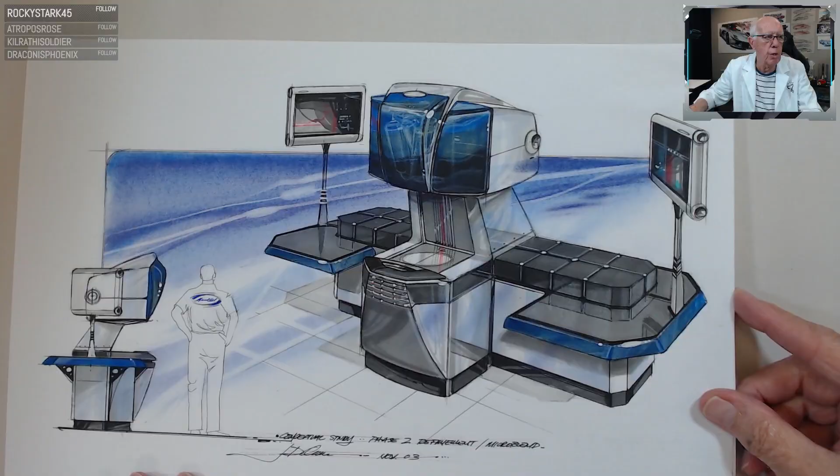And again, it was certainly worth the journey because there were so many pieces along the way. We couldn't really determine what would be the right approach, but we kept looking at how much space we have. Is it a large space? Is it a small space? Is it freestanding? Is it a large store? Is it a small box area? Is it a resource area? Is it in a mall? All these pieces had to be addressed to get the final piece done.

So there's the actual finished sketch itself right there. Interesting, that's the original color. And then these are just some color copies. I think the rest of these are color copies of the same approach. Yes, it is. So that wraps up the actual module itself.

But last but not least, I want to just show you something. Pardon me as I move this along. Get these organized.

So I'm going to pull these aside for a moment. Let's do this. And these are starting out some very quick little thumbnail sketches based on what that paint shop might look like, given this area off of the Costco property. Again, the fuel station would be behind it. Actual entry into the actual paint store itself. And you get a drive-through, open it up, garage for storage for deliverables. Walk into the store, a very small little area on their site to put together this whole process of this microblend painting system. So that was the first sketch I put together.

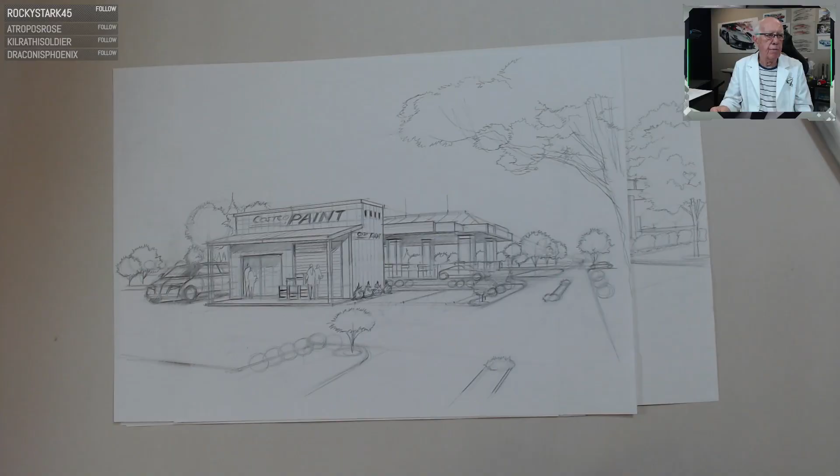And the second sketch was a little bit more expansion of that same thing. Just take a little larger look at what this might look like. Again, notice now we're moving from product design, which is the actual module, into some interior space work inside big box areas, and what that might look like. Now we're doing an architectural study, which went interior and architectural exterior. Just amazing how the whole thing began to expand as a result of this becoming much more receptive and favorable to look at and work with, replacing some of the complicated paint systems they're dealing with presently. And I think it's still active today out on the West Coast.

But anyway, so there's another little thumbnail sketch, page 2. And again, another little variation, different view in this thing, showing you a little more of the fuel station behind the actual module and the actual store itself. Very small, but compact enough to get the job done and begin to be a freestanding piece for paint mixing. And then here's another little variation on theme. I think this is almost the same one, just expanding a little bit more on the actual concept sketch itself. There's a little pencil study. And then last but not least, let's move into this.

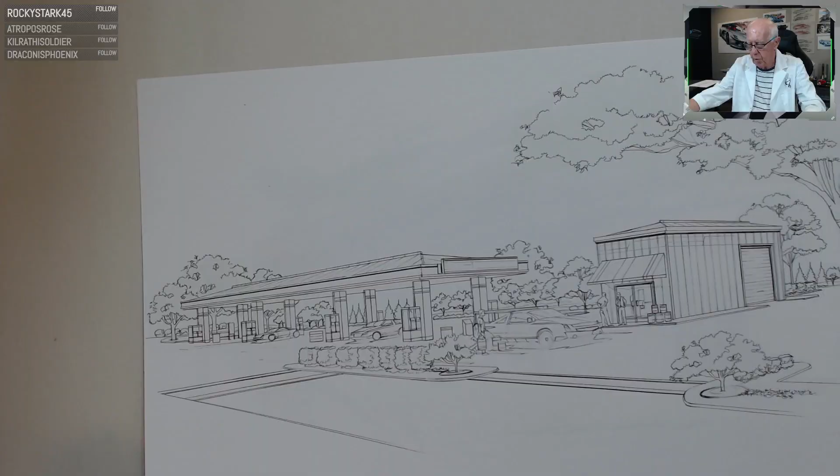Let's get back to this. This became the actual final line drawing of the Costco piece itself. This was the fuel station setup, and there's actually a bit of a change in the format of the store itself. Let's move that up here. There's the actual line drawing for the exterior space at Costco.

Again, this is all in Tucson or the West Coast, California, Mexico, Oregon, and Arizona. So they had the fuel stations all set up, and then they wanted to put this little auxiliary building next to it. This was the Costco piece.

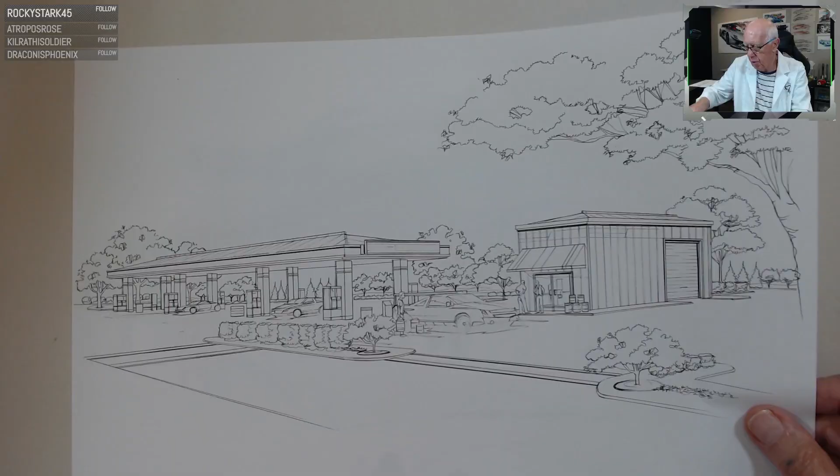This was for Microblend paint at Costco, for mixing the paint system. There's an actual line study here, and then the piece we'll wrap up with is this line drawing, followed by the final illustration of this exterior piece.

As you can see, the expanse, starting here, going back to this, to get to the actual final module, which I pull out here on one side - the actual final illustration piece is right here. So once again, we have the actual module itself, and then the actual product itself.

Without going back into the archives, there are some interior sketches at Costco and the big box areas, plus an exterior architectural piece to finish it all off and put it to rest in terms of what the project was all about.

So really, thank you for your patience. It's an awful lot to go through here, but this was such a massive operation when it all started. It was a very theoretical, hypothetical approach to a revolutionary way to mix paint, to get rid of a lot of retail clutter, and the process worked really well.

I think it was about a two-year project for me, extremely demanding in terms of going back and forth with sketches - facelift this, let's try this, have you looked at this, have you done that? It's a typical design process, but so much going on in terms of the actual content. Very worthwhile from the point of view of exploring what a whole new idea was.